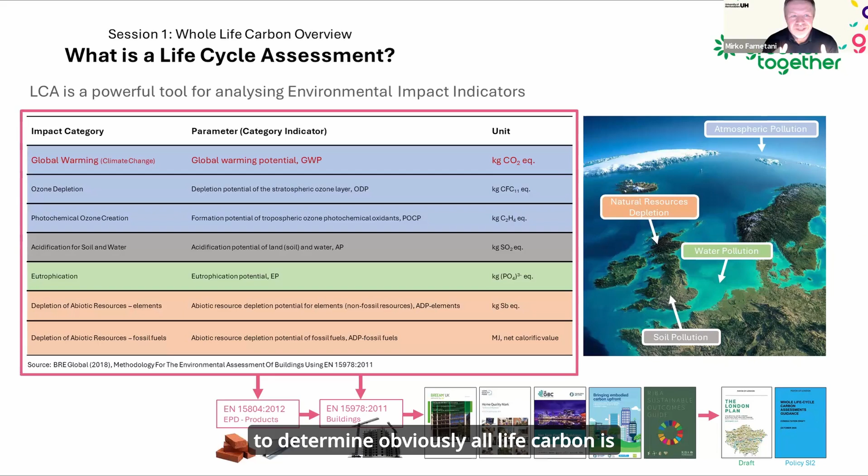So let's start from the whole life carbon overview. What is important to determine whole life carbon is to use a tool with which it is possible to prepare results for this particular sustainability aspect. And the tool we normally use is a life cycle assessment. Now, a life cycle assessment is a powerful tool for analyzing environmental impact indicators.

I would like to stress environmental impact indicators because what we normally assess in terms of whole life carbon is normally one indicator that is possible to assess in life cycle assessment. And the indicator is the global warming potential. The global warming potential is normally called embodied carbon as well. So in other words, if you hear about global warming potential or embodied carbon, consider the fact that they are the same thing.

I think what's important in whole life carbon, in life cycle assessment and all the indicators, is that by performing a life cycle assessment it is possible to define a lot of impact indicators that show not only the impact on the atmosphere, meaning global warming potential, but also water pollution, soil pollution, and natural resource depletion as well.

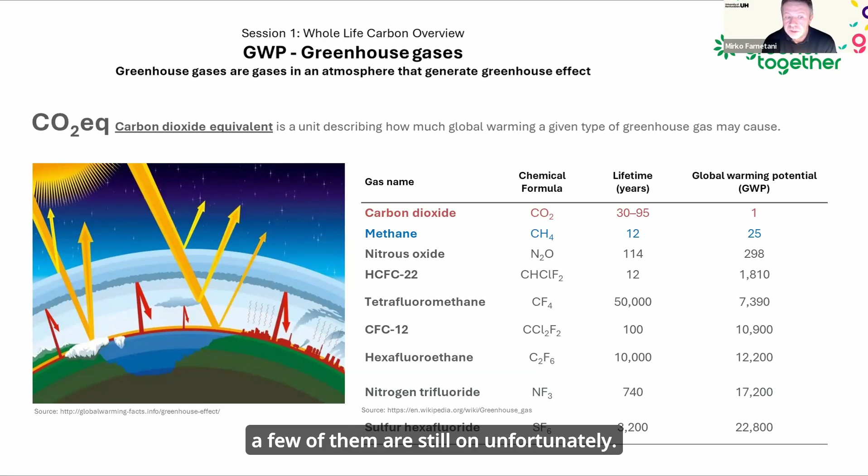Okay, so next slide. So in order to define the whole-life carbon, it is important to understand that whole-life carbon is the sum of embodied carbon and operational carbon, okay? And particularly the embodied and operational emissions are to be considered from the extraction of raw material till the end of life of a building. So this basically defines the whole-life carbon.

It is important for you to understand all of these definitions, because if you have to deal with projects, particularly for clients' requests, it is important to address the meaning of all the expressions, because in this case you have to deliver what the client brief demands.

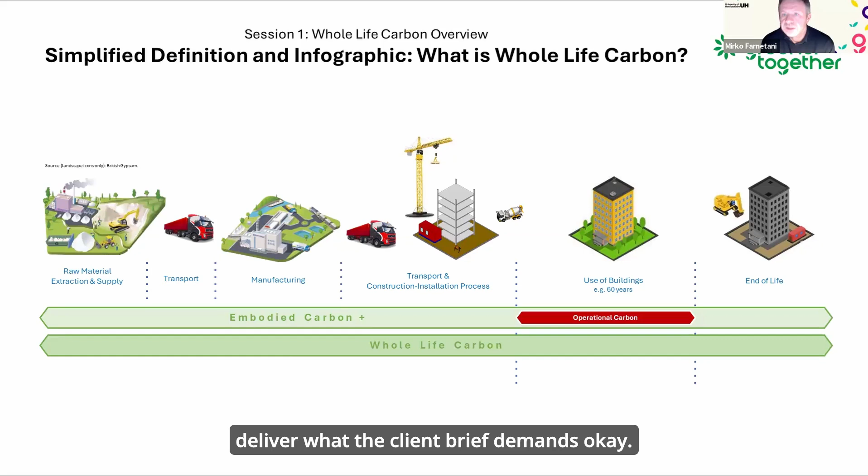Now, I mentioned before that in order to assess buildings, we normally use in the industry the EN 15978. The EN 15978 is a European standard, but it is used globally. It is actually used in the US as well. However, there is another international standard, the ISO, I think it's 22,000 and something, or 27,000 and something, that is very similar to the EN 15978, but of course there is something different. However, they are considered as equivalent.

Now, the reason why I'm saying so is because, again, it would be very useful for your personal knowledge to know all of these data, if you will need to deal with all of these requests. So this graphic comes from the LETI embodied carbon primer. If you haven't downloaded it, you can download it, because it is free, available from the LETI website.

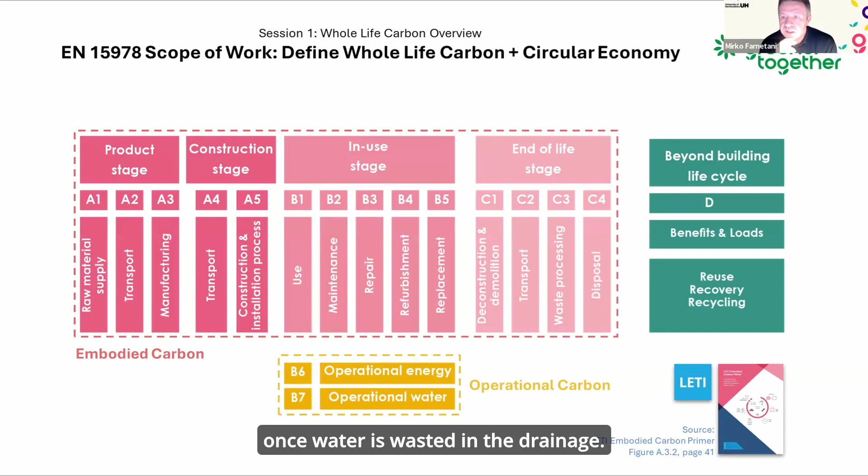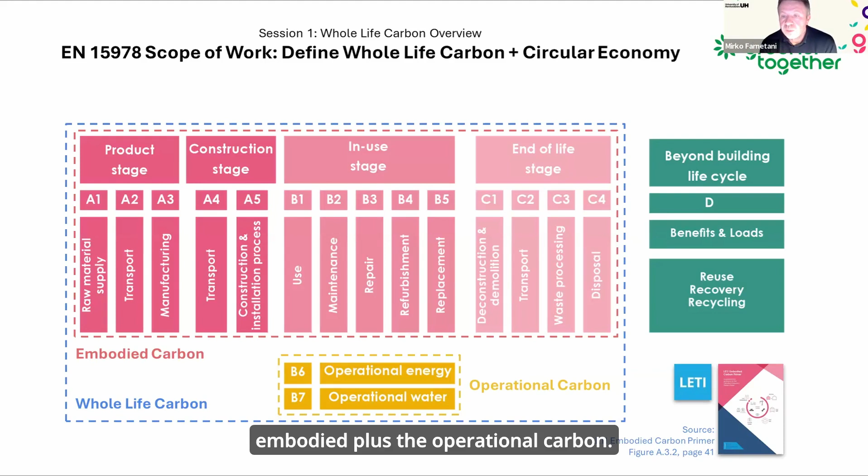The whole-life carbon, as defined before, is obviously the embodied plus the operational carbon. I think the concept is straightforward, I suppose. So the standard defines another module, which is called module D. And module D defines circular economy benefits and loads. This is defined by the standard, particularly for the reuse, the recovery, and the recycling of building materials after the end of life of a building.

Okay. Now, if you consider, for example, modules B4 and B5, refurbishment and replacement, of course these are emissions that happen during the life of a building. For example, if you take into consideration replacement in a commercial building, a typical replacement could be the replacement of carpets, floor finish carpets. In this case, the emissions should be reported under these modules. And if any piece of carpet is going to be recycled, reused, or recovered, it will be reported under module D as well, because it is considered end of life of a building product.

Okay, so we can move to the next slide. Are there any questions here at all? No? Okay. Oh, we don't have any questions. If there are any, I will tell you. Yeah, okay. Thanks.

Okay, so I think this is a particularly important subject, meaning the scope for carbon reduction, because normally in embodied carbon analysis, what is important is not only to analyze, but to reduce the impact as well. So normally in a typical building, a reduction between 15 to 25% against a baseline is possible to be achieved without any cost increase. If the building targets a reduction above 25%, there could be some cost implications. Now, this is a kind of rule of thumb. Every building is different, and therefore this percentage could vary. But you can use it as a kind of rule of thumb.

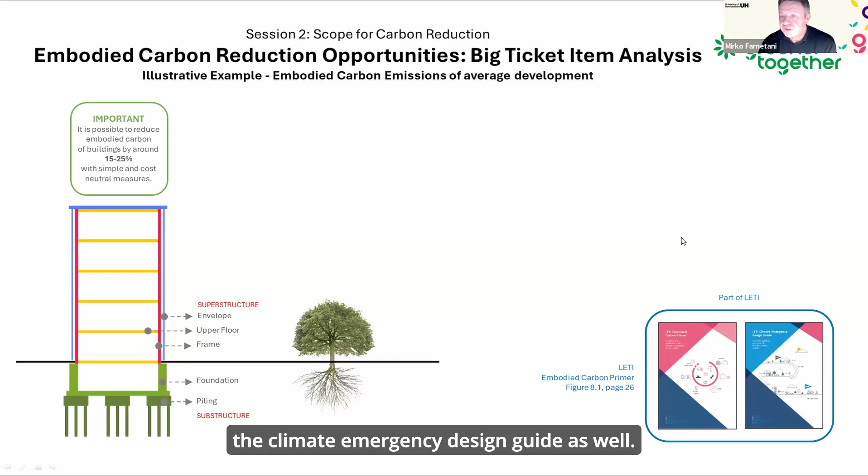So I'm going to talk in this session about the big ticket item analysis. This is normally the kind of analysis for preparing an embodied carbon reduction strategy. It is defined in the LETI embodied carbon primer and the climate emergency design guide as well, so you can download them and find out more. Right, so the first step to be carried out is to analyze the full building. This could be a typical analysis of a full building, and a few building elements are more carbon intensive than others. So this is a kind of typical distribution. Of course, it could be completely different. It depends on building types and building element types as well.

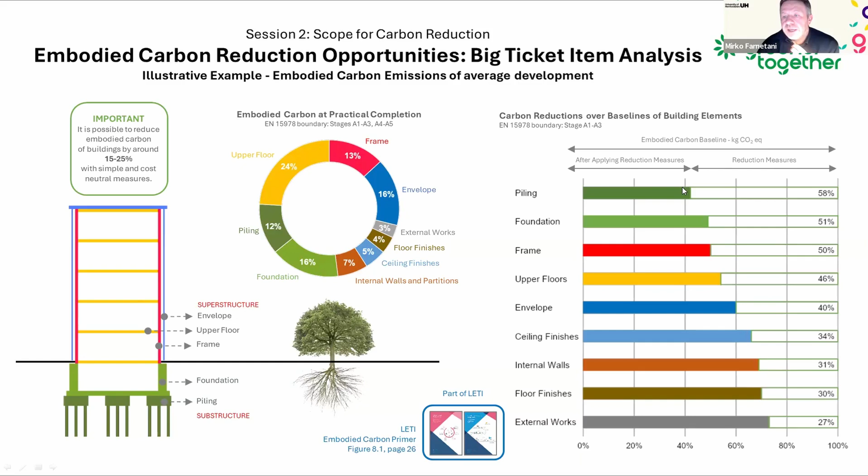Now, if we carry out a further analysis, and particularly if we try to understand what kind of building element is more carbon intensive, and where the low carbon measures are possible to be achieved, this could be a typical graph you can prepare. I'm talking about the bar chart here on the right-hand side. So in other words, for example, for the piling it is possible to reduce the embodied carbon emission by 58%. The upper floor, in this case, can be reduced by 46%. The external works by 27%.

Now, of course, it is understood that the top 5 building elements are the most important building elements to be addressed. This is because, first of all, you can achieve the highest reduction measures, and also because you have to consider the carbon distribution of the full building. In fact, you can see that envelope, frame, upper floor, piling, and foundations are the highest emitters in terms of building elements. Now, if you consider those 5 building elements and their potential for reduction in carbon emissions, you will achieve the highest embodied carbon reduction. Of course, it is a rule of thumb that if you address the biggest contributors, you will achieve the highest reduction with the minimum effort.

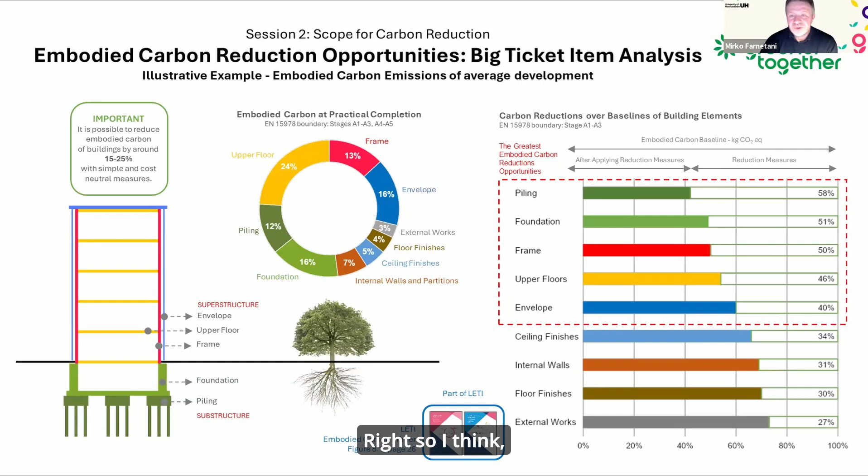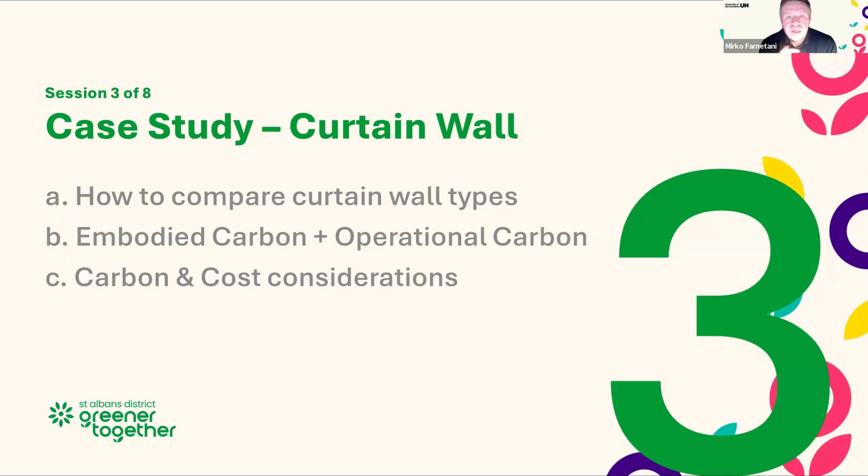Right, so if you have any questions, feel free to ask, because now we are moving to the second part of the presentation, which is the case studies. So the first case study is the curtain wall. This is a case study you can download from the website, and there will be this picture here and other details. However, this case study was used for preparing chapter 2 of the Targeting Zero book. I am the co-author of this chapter. So if you want to know more, you can buy the book and read the full contents as well.

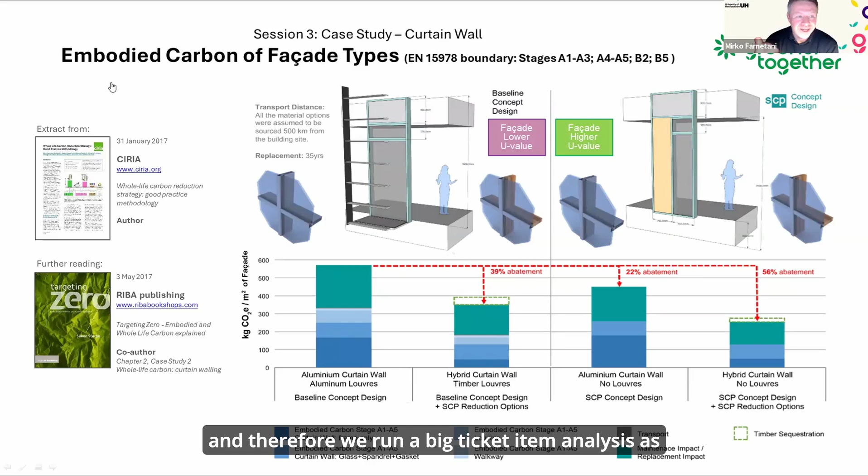So just to describe this case study, the facade case study is from a building in the King's Cross area. At the time when I was involved in the project as a carbon lead, our scope of work was to reduce as much as possible the carbon footprint of the building, and therefore we ran a big ticket item analysis, as I showed before. What came out was that the facade had a pretty considerable impact within the full building carbon assessment. So we tried to understand what was possible to be done in order to decarbonize the facade.

What we did was analyze the first option facade, which was a kind of fully glazed building plus a facade louver, to prevent direct sunlight penetration and to reduce discomfort in terms of glare. So the first idea we came up with was to change the facade layout. Instead of having a nearly 100% glazing ratio for the facade, the proposal was to go for more or less a 50% glazing ratio. Actually, if you consider the spandrel, it is higher.

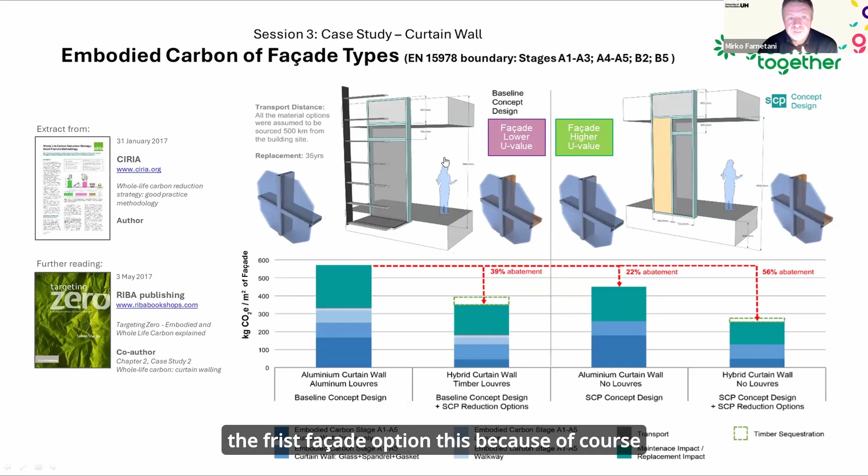Just by doing this, it was possible to achieve 22% abatement compared to the first facade option. This is because it was possible to not consider the facade louver, and so it is possible to achieve this kind of 22% abatement.

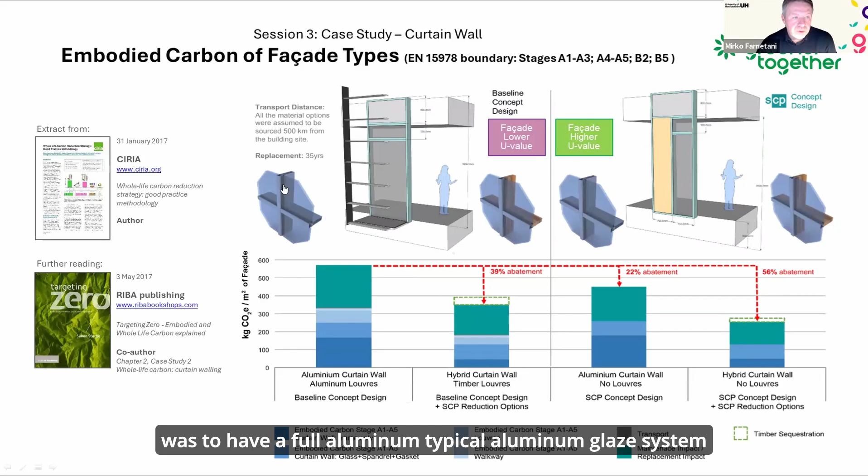Now, because we were not happy with the result, we decided to apply an additional low carbon measure. The initial idea was to have a typical aluminium glazed system. What we introduced, instead of a full aluminium frame curtain wall system, was a composite curtain wall, meaning timber frame internally and aluminium frame externally. This generated a lot of carbon reduction. By going from a full aluminium curtain wall to a composite aluminium curtain wall, it was possible to achieve 39% abatement.

And then, if the carbon reduction is linked to both the new facade layout and the new curtain wall frame, meaning composite instead of full aluminium, a further reduction was possible to be achieved, meaning 56% abatement compared to the baseline. I have to say that 56% abatement is an amazing result.

But obviously, this was a suggestion to be taken into consideration by the design team. And actually, I was very happy that the design team, particularly the architects and the facade engineer at the time, were very happy to take on board our advice from our consultancy, and they decided to go for this kind of layout.

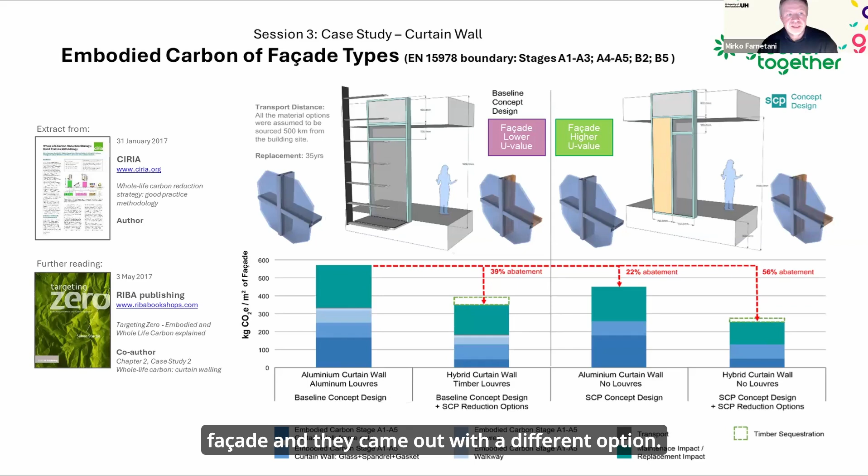So in this case, the architects and the facade engineer redesigned the full facade, and they came out with a different option. Now, because the client was very keen on reducing the carbon, the client was keen on exploring the composite curtain wall as well.

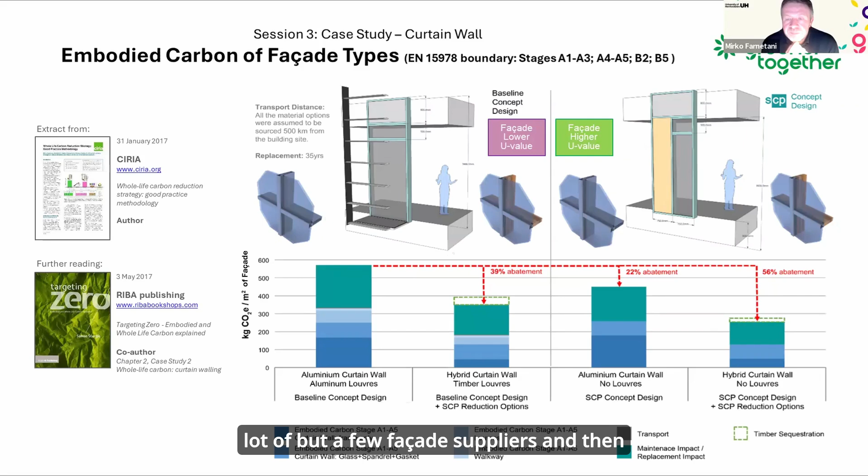So in this case, a market investigation was carried out, and the market investigation was to contact, let's say, a few facade suppliers. And then we requested the cost of delivering both the aluminium curtain wall and the composite curtain wall. The exercise was carried out with a cost consultant as well.

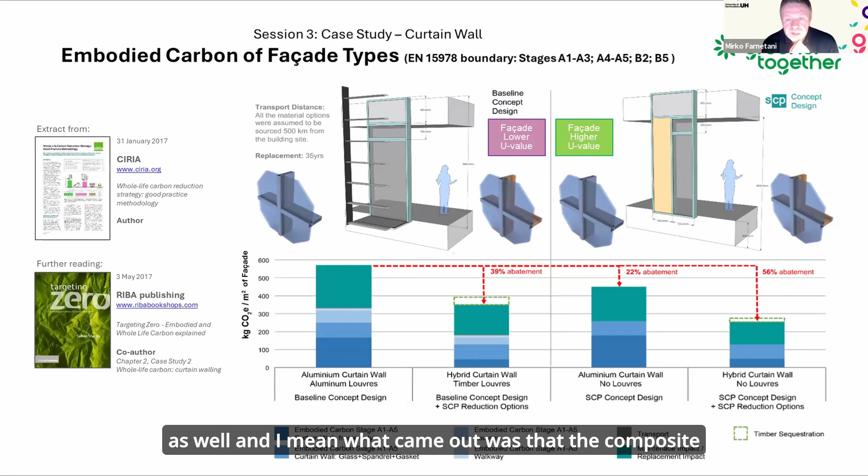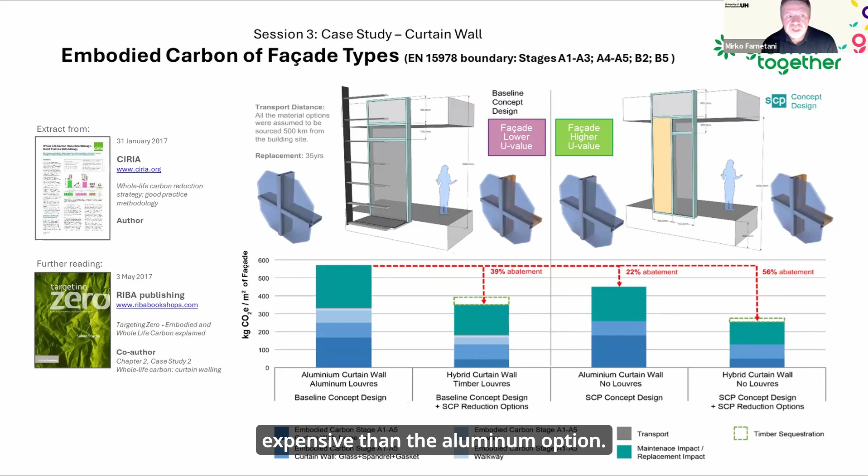And what came out was that the composite curtain wall, unfortunately, was more expensive than the aluminium option. So in this case, the client came out with their conclusion, and they decided to not proceed with the composite curtain wall, because the price of the facade was out of their budget.

Okay. However, from my point of view, what was very interesting in the exercise we carried out was that we basically established a new way to approach how to procure facades in the construction industry. And of course, it was an amazing lesson learned for everybody.

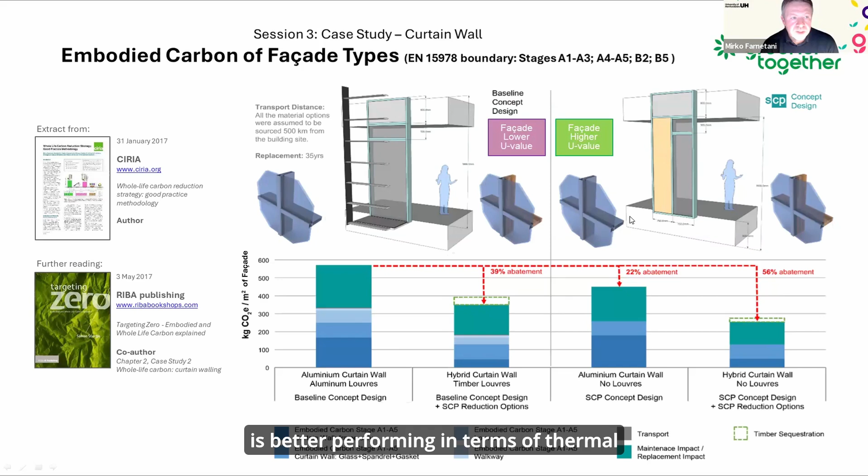So something to add to this case study is that the reason why the alternative facade layout was successful was that the alternative facade is better performing in terms of thermal performance as well. Meaning, this facade U value was higher than the previous facade layout. And therefore, it was able to achieve a lower energy consumption with the alternative facade. Perhaps it was successful for that reason as well.

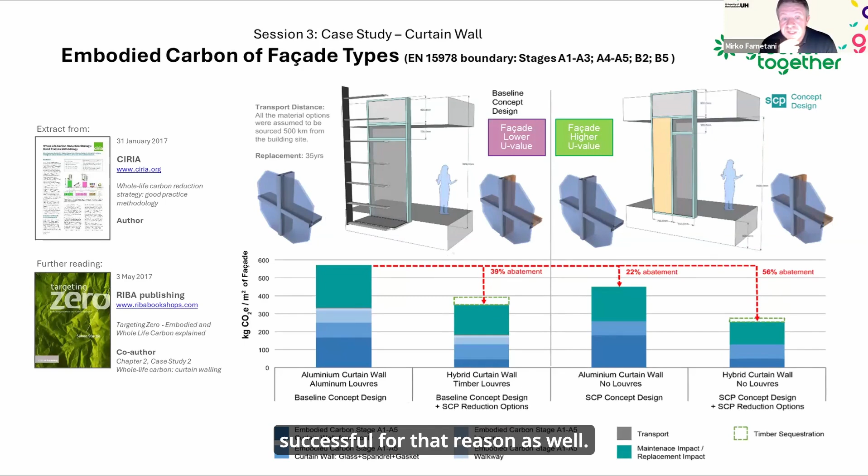Okay, so I think we can go to the next case study, which is about paint and paint types. So this is a typical comparative of paint types that could happen in any kind of project. I think what is important here is to understand how a comparative analysis of a particular product could be done. And so in this case, the brand is Dulux, and all the options are about

one brand. However, it is good practice to carry out a multi-product comparison as well, meaning in terms of supplier, okay? Because in this case, you can explore other suppliers. It could be that other suppliers come with better carbon figures, and it could be that another supplier could be cheaper and lower carbon as well. So it is good practice to investigate multiple suppliers, but for the purpose of this session, this can give the message I would like to convey.

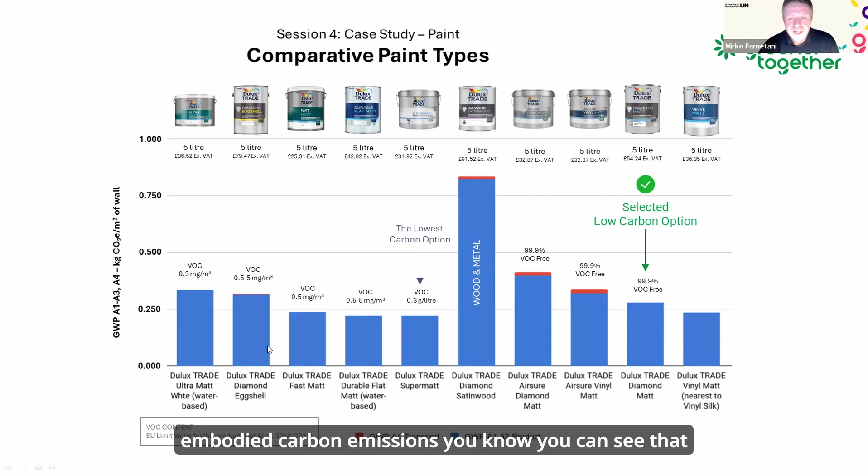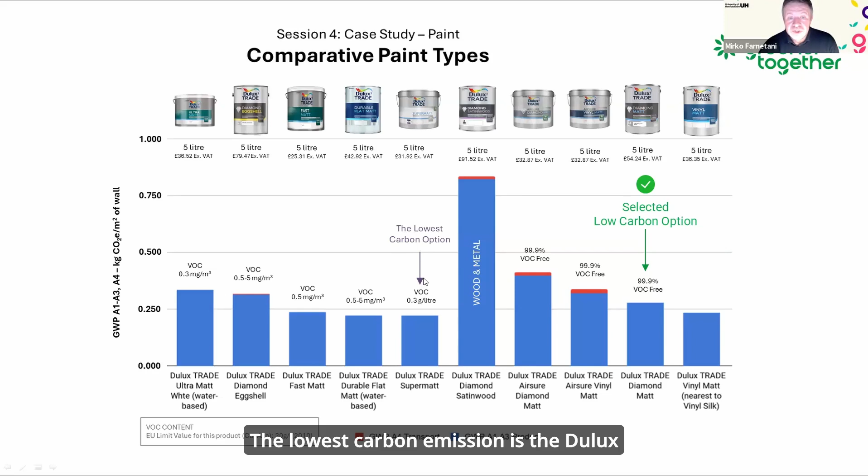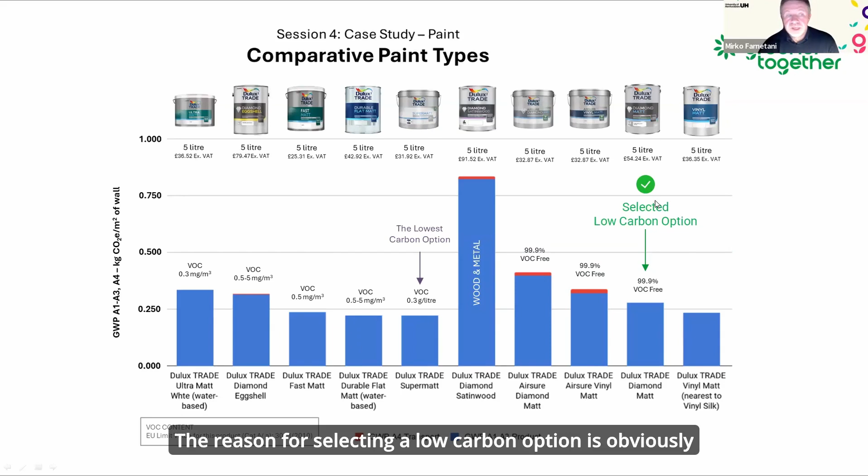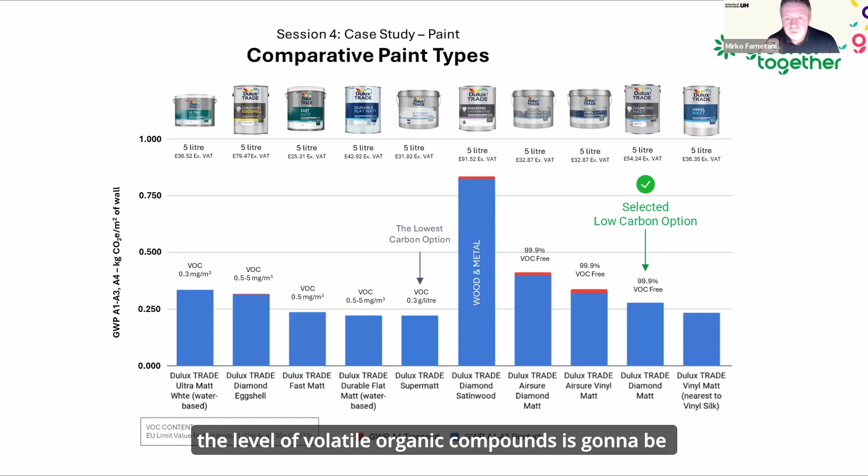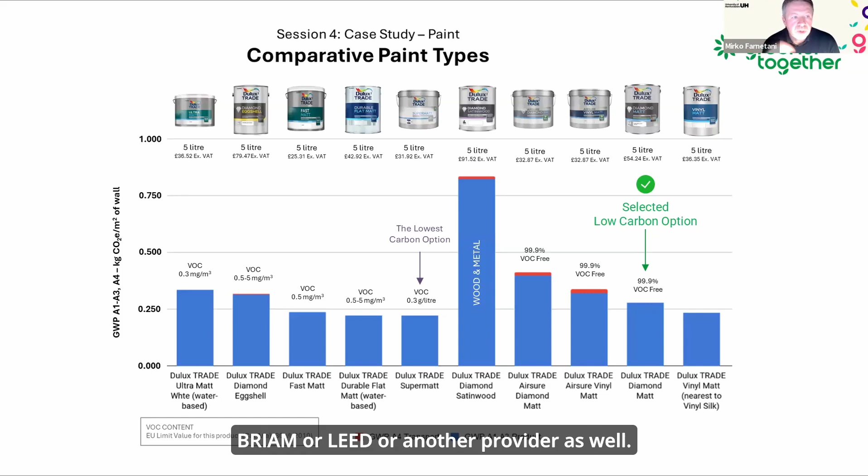Okay. The reason for selecting a low carbon option is obviously not only carbon, but there are other indicators as well, and they are very important, particularly for interior design. So one of the important indicators to be considered is the volatile organic compound index. This is because these are paints which are going to be used for interior design, and therefore the level of volatile organic compounds is going to be important, particularly if you are reporting towards a green rating system, for example, BREEAM or LEED or another provider.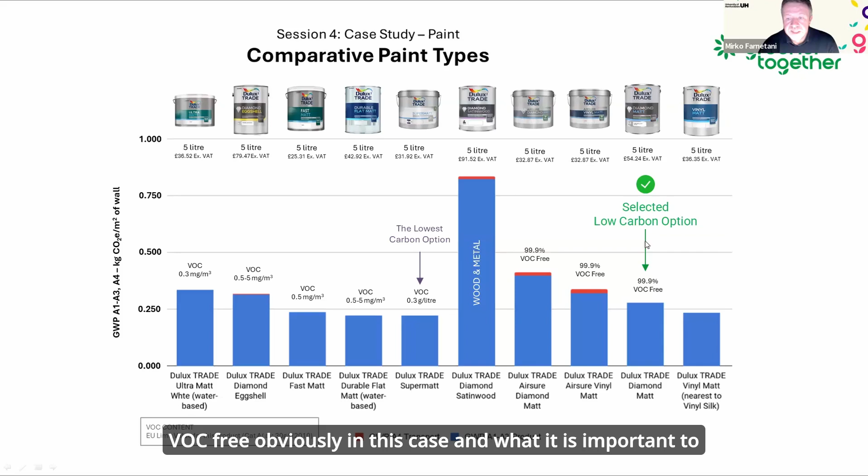What you can see here from the difference between the lowest carbon option and the selected option is that the selected option comes with a better VOC level. It is nearly 100% VOC free in this case. And what is important to understand as well is the EU limit value for volatile compounds. So this could be another important indicator to be considered for your designs too.

However, what is important as well to be considered in paints is the quality of paints. So in this case, the Diamond Matt was decided to be adopted because of the quality of the product as well.

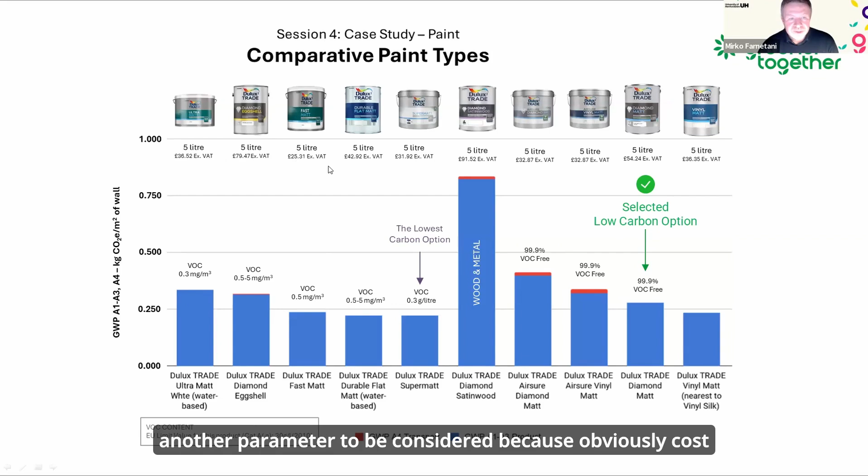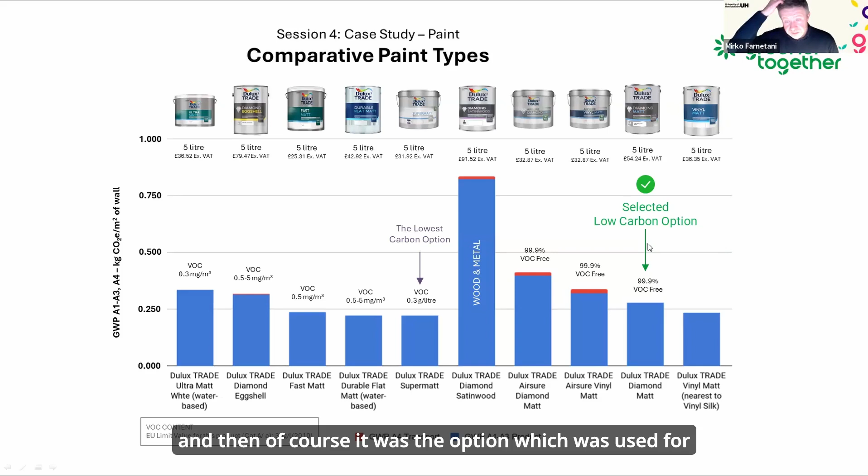So talking about costs, this is another parameter to be considered, because cost is always good to be considered. In this case, it is clear that the selected option was not the cheapest. And so in this case, what was very important was to go for a high quality product and for low carbon, and for low VOC as well. It was a good compromise, let's say, between environment and cost, and it was the option which was used for the interior design.

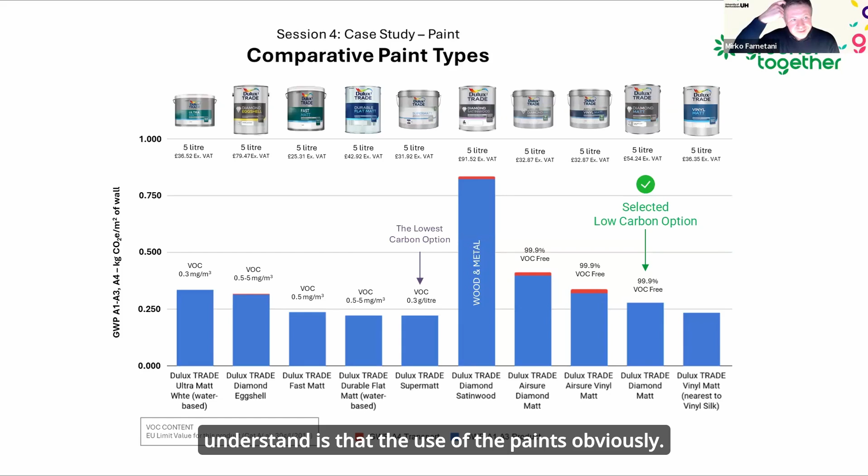This one. What I want to mention in this case is that when you compare this kind of products, what is important to understand is the use of the paints, obviously. For example, if you assess paints with closed eyes, it could be that you consider this kind of

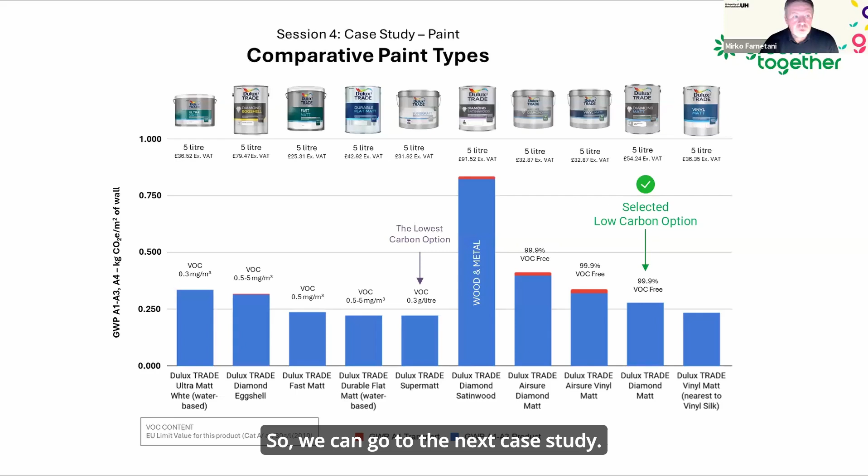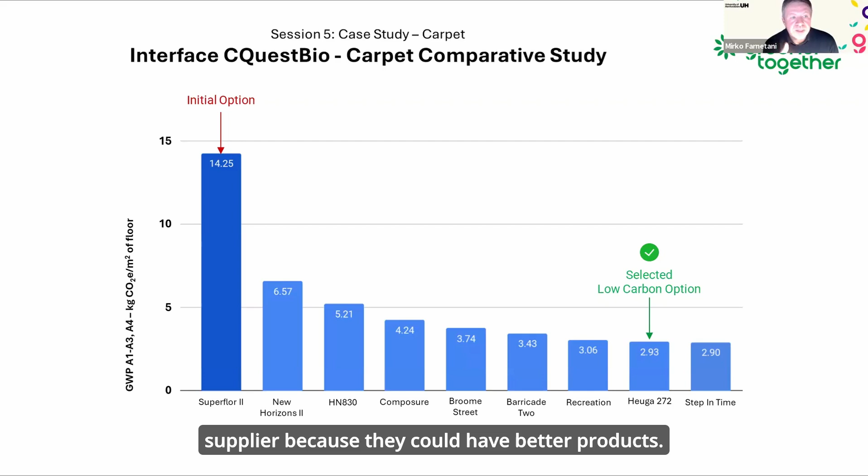case study. So the next case study is carpet. Again, it is very important to carry out a comparative analysis of products. In this case, again, it is one brand, which is Interface. And as I mentioned before, it is always good to compare other companies, other suppliers, because they could have better products. However, when dealing with this kind of items, it could be that the architects are more keen on a specific brand, and therefore perhaps the architect would like to consider only one brand. Okay, so this is another potential element to be considered in your assessment.

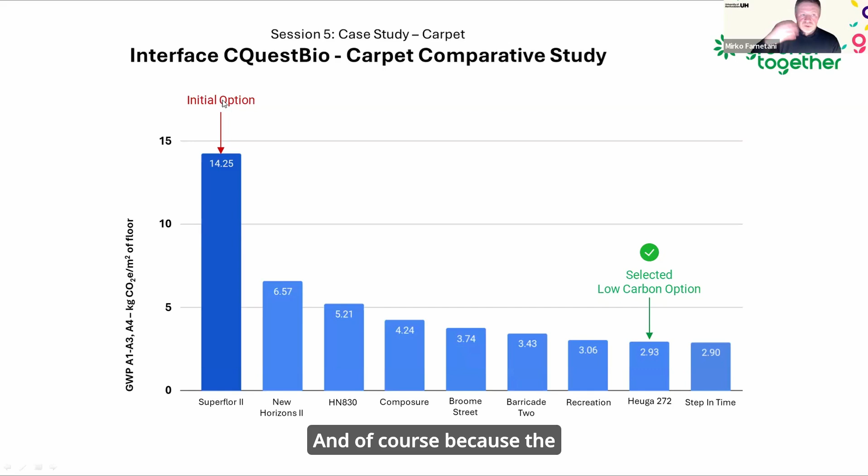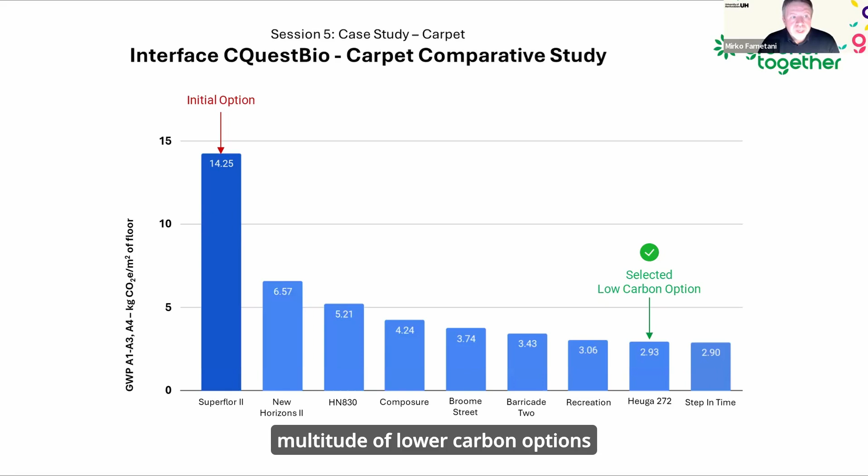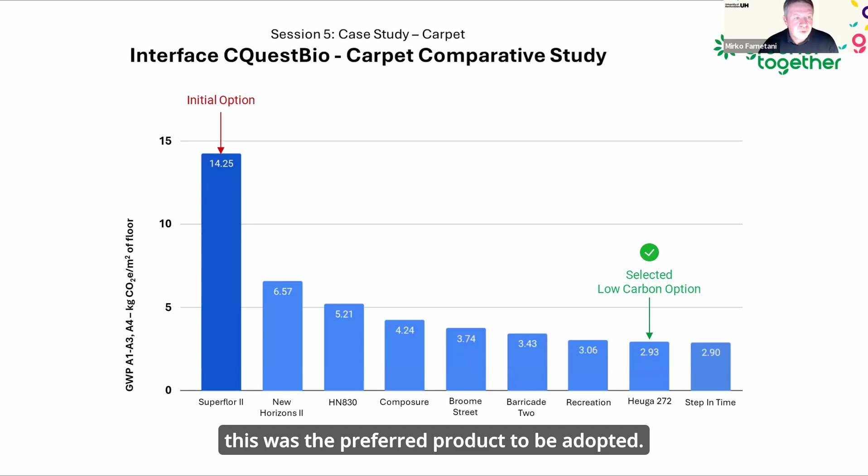Just to talk about this case study in particular, the initial idea was to use this particular item, and of course, because the project was to decarbonize the interior design scheme, any potential alternative to the initial idea for the carpet was analyzed. And what was found out was that there were a multitude of lower carbon options. And after talking to the architects, it came out that this was the preferred product to be adopted.

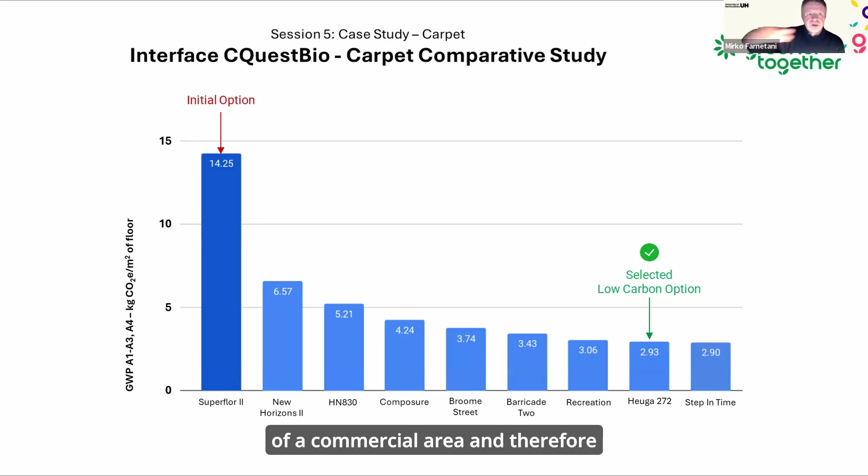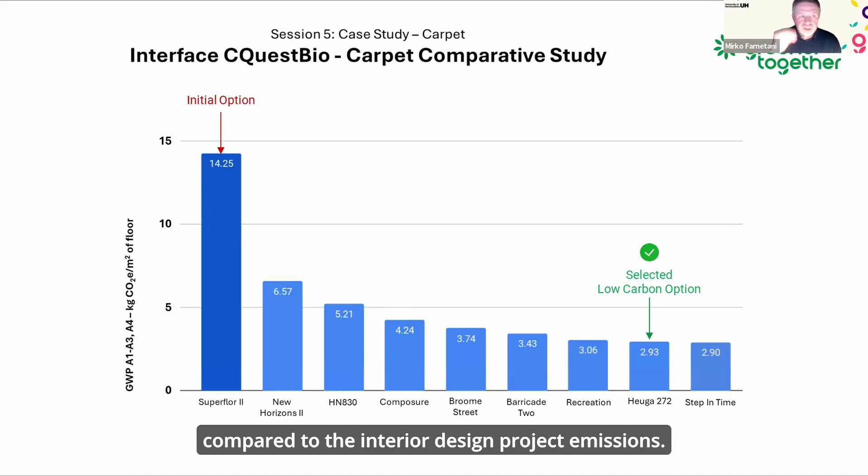And actually, if you compare the two inputs, it is clear that the reduction was definitely bigger, particularly because carpet normally covers more or less the full NIA of a commercial area. And therefore the reduction could be pretty considerable compared to the interior design project emissions. I have to say that in this case the adopted option was cheaper as well compared to the initial option, and therefore this was a win-win situation.

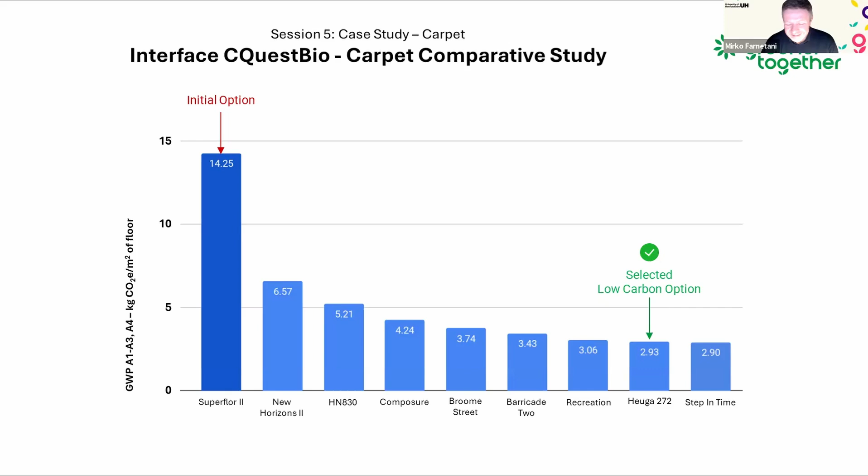Okay, so the next slide is still about carpet, and the reason why I like to compare those two products is because often a project could take into consideration only one brand and not consider other brands, which could be less carbon intensive. So in this particular case, it is clear that the left-hand side is more carbon intensive than the right-hand side. And often this kind of approach could be a bit misleading as well, because

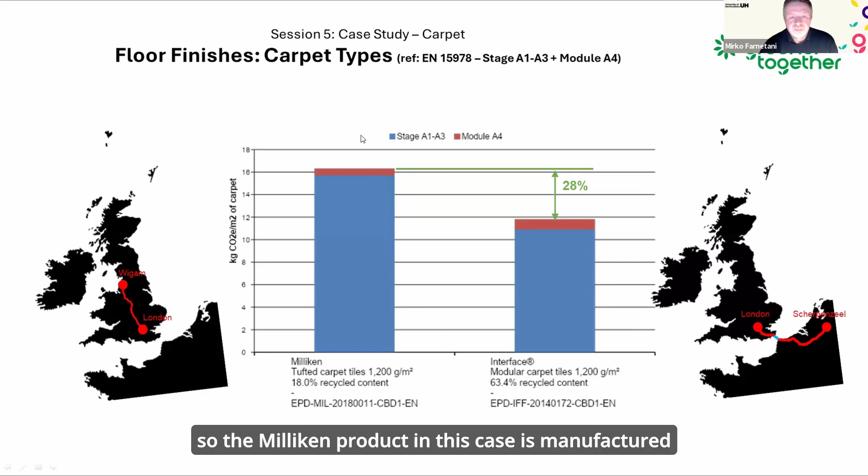the Milliken product in this case is manufactured in the UK, whereas the Interface option here is manufactured in the Netherlands. So it could be understood that a product which comes from a closer location could be less carbon intensive. This is not always the case. In this particular example, I just wanted to demonstrate that although a product could come from a closer location, the product itself could be more carbon intensive than something which is produced further away.

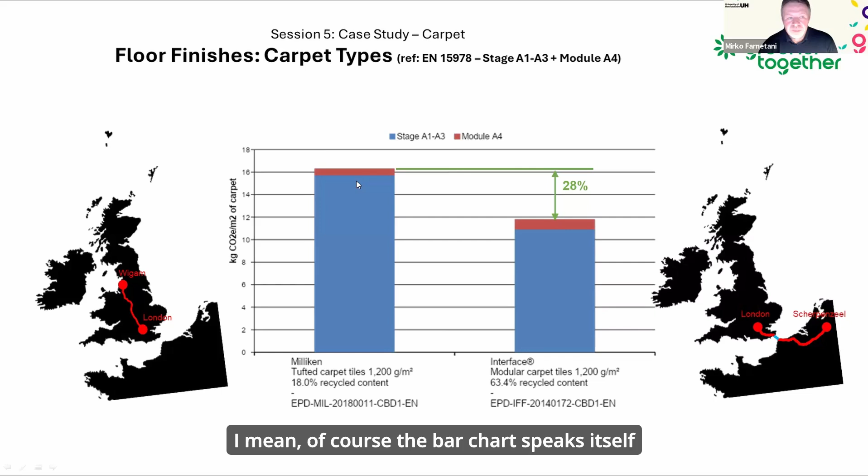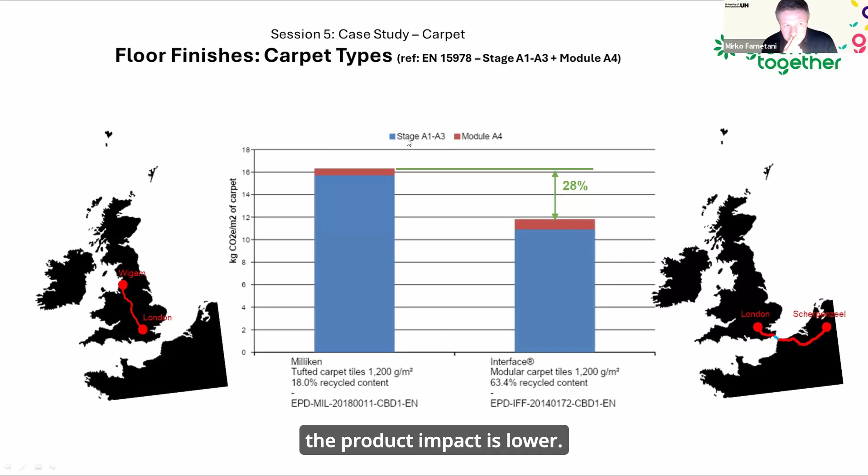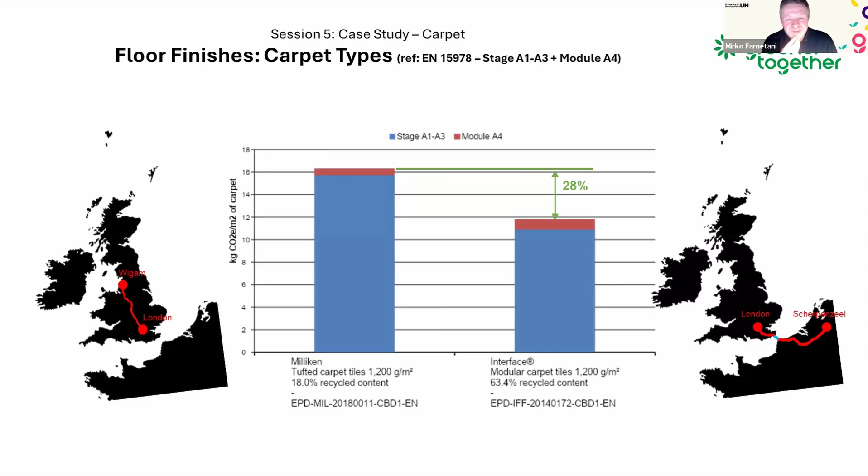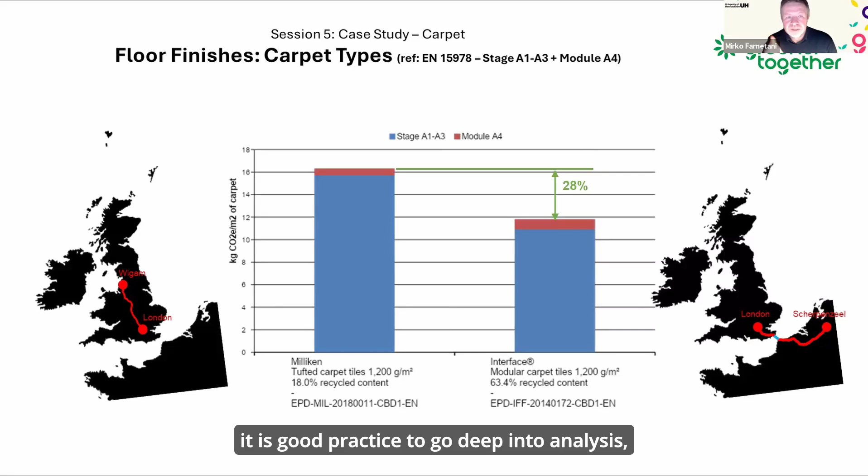Of course, the bar chart speaks for itself, and it is clear that the blue bar, which expresses the product impact, is lower. However, the transportation impact, the red part of the bars, for the Interface transport is higher. However, if you look at both, the Interface is still the lowest carbon option. I like to introduce this kind of slide because it makes you think about all of this kind of analysis, and sometimes it is good practice to go deep into analysis in order to find the best carbon option.

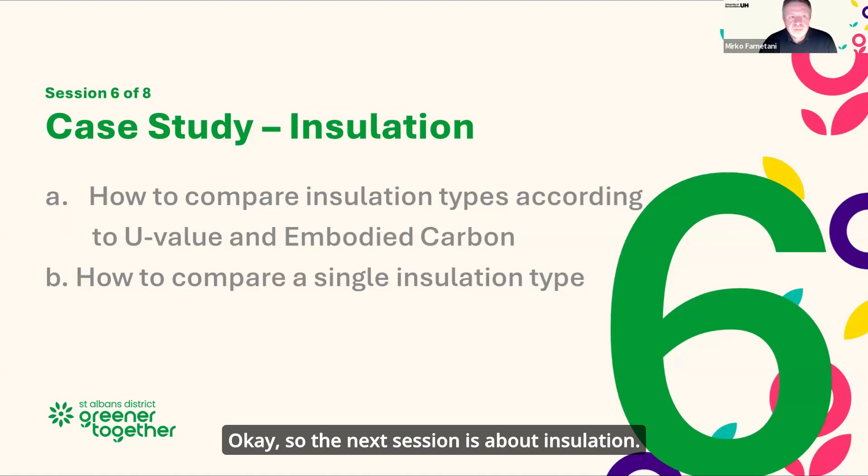Okay, so the next session is about insulation, the case study for insulation. This is another case study. This was actually a retrofit building where the insulation was considered to be used in facade replacement or facade enhancement. This was part of the study I led for this particular project, because the client was wondering if it was better to enhance the facade or to replace the facade.

So in this case, an analysis of the insulation types was carried out, and here are the results. You can see that it is not only one brand, but a multi-brand study. However, because the facade was under fire regulation, the facade insulation had to be Class A, so it should be fully non-combustible. Therefore, the two options here on the right-hand side were disqualified after understanding that the insulation had to be non-combustible.

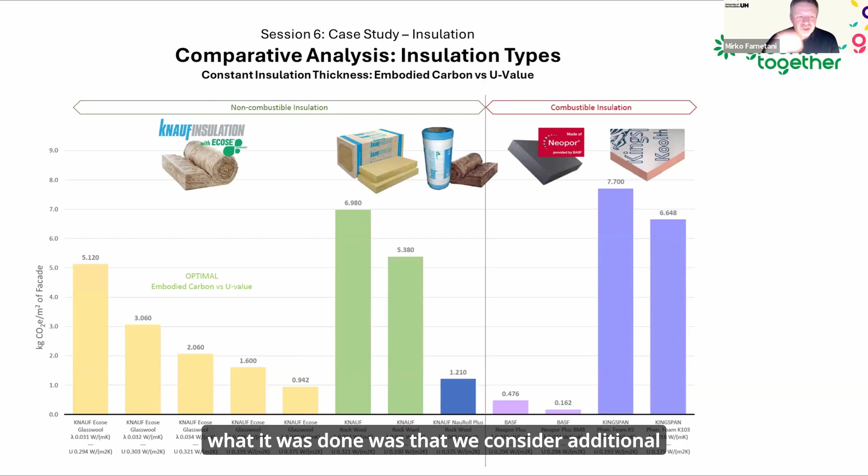Throughout the discussion and the analysis, we considered additional insulation types as well. We added to the equation, meaning to this graph, an additional insulation type, which is the aerogel. Now, the client was very fascinated by the aerogel because it was possible to deal with a reduced thickness of the facade.

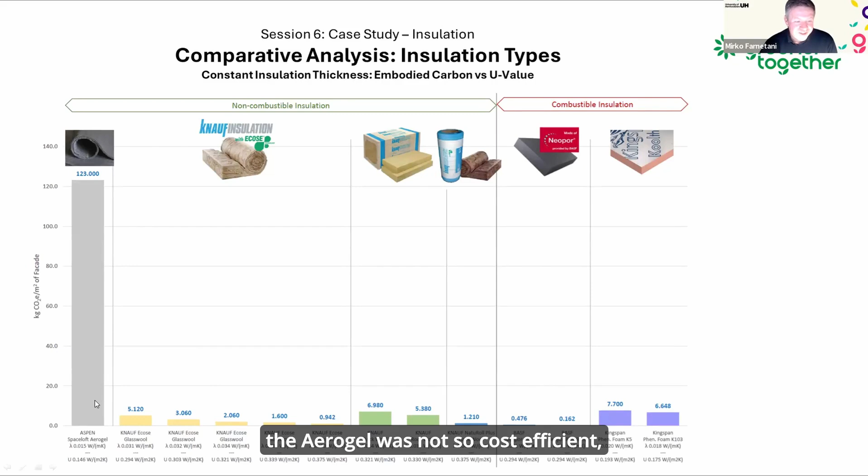Okay, so in this case, what the client was interested in was that the NIA of the project could increase because of the reduced amount of facade insulation. However, because, as I mentioned, a cost analysis was carried out, it was found that the aerogel was not so cost efficient. Actually, it was much more expensive than mineral wool.

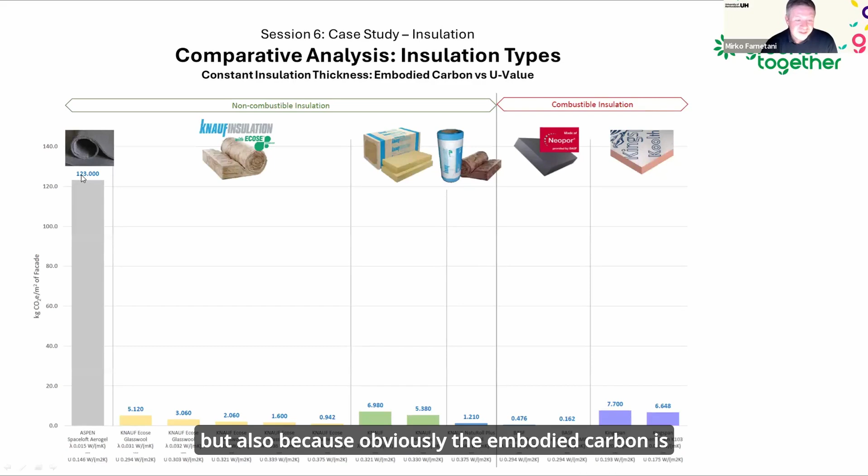And despite the fact that perhaps it could be beneficial for NIA, it was decided to drop it as an option, but also because the embodied carbon is definitely higher than all the other solutions. So perhaps it was a wise decision.

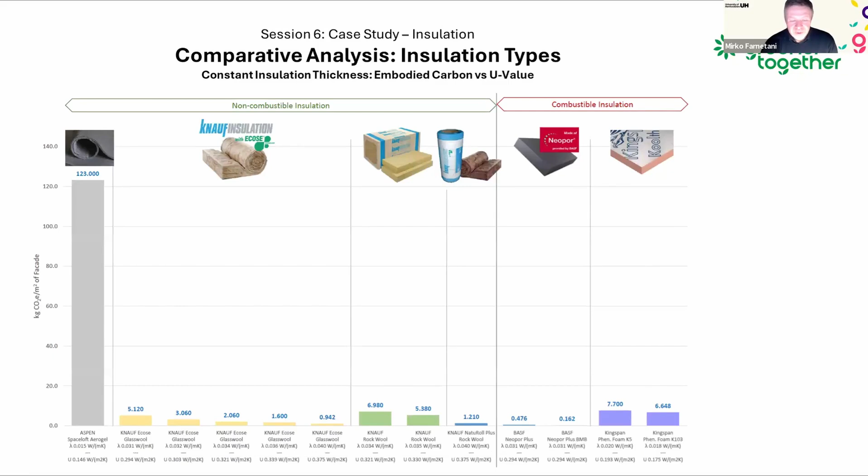Okay, so we can move to the next slide, and this slide links the importance of facade U value and embodied carbon, meaning it is an excellent example to link operational and embodied together. Particularly here, the case study is about the insulation layer of the wall buildup. Of course, the insulation layer is the element that provides the thermal characteristics, and therefore it contributes to the embodied carbon and to the wall U value as well.

So in this case, five different kinds of insulation were considered, and the analysis was carried out by considering a fixed U value of the wall. Because all the insulation types come with different thermal performance, the insulation thickness within the wall buildup was different. As you can see here, the phenolic foam thickness was to be 95 millimeters, whereas for the rock wool option, the thickness of the insulation was 160 millimeters.

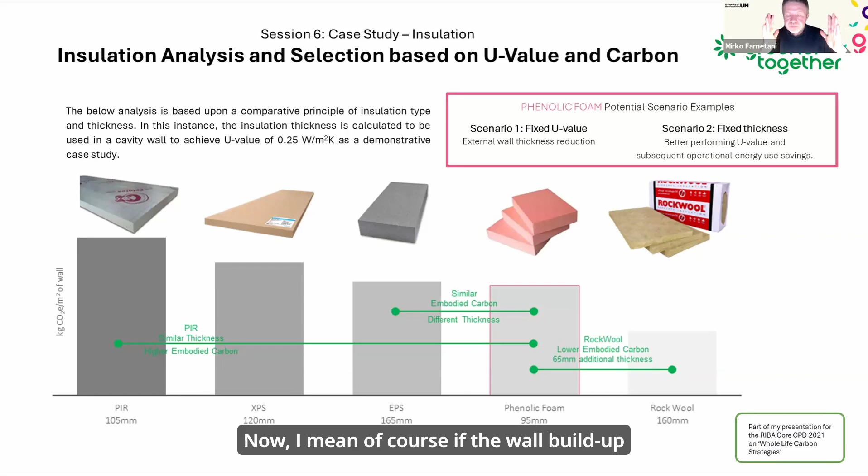Okay. Now, this is another parameter to be considered in your design, because if the target was to adopt, for example, the lowest embodied carbon option, the wall buildup would have had to be wider. And if the wall buildup is wider, in order to install the rock wool, there could be more subframe needed to support the facade cladding as well.

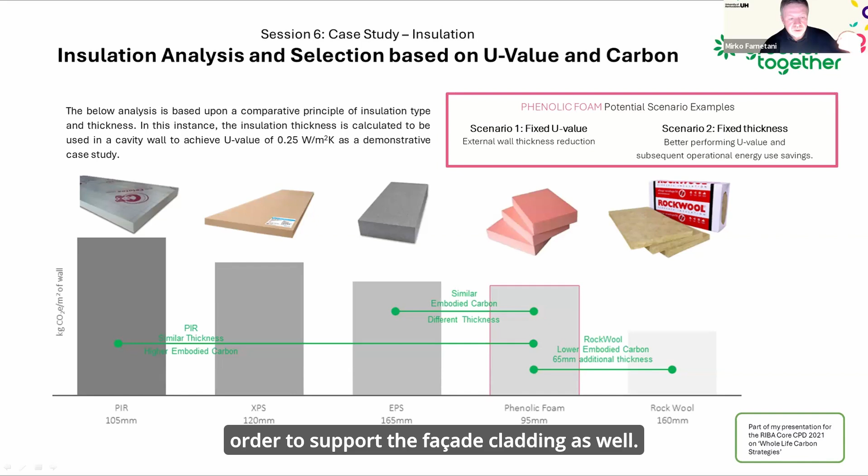And of course, in this case, perhaps although the rock wool insulation comes with a lower embodied carbon, it could be that the metal subframe could be more carbon intensive than the phenolic foam, because of course the gap would be bigger. Okay, so I just add all of this information to the presentation, because these are the typical questions that you should ask the design team, and particularly these are all the considerations that you should come out with in all of your analysis as well.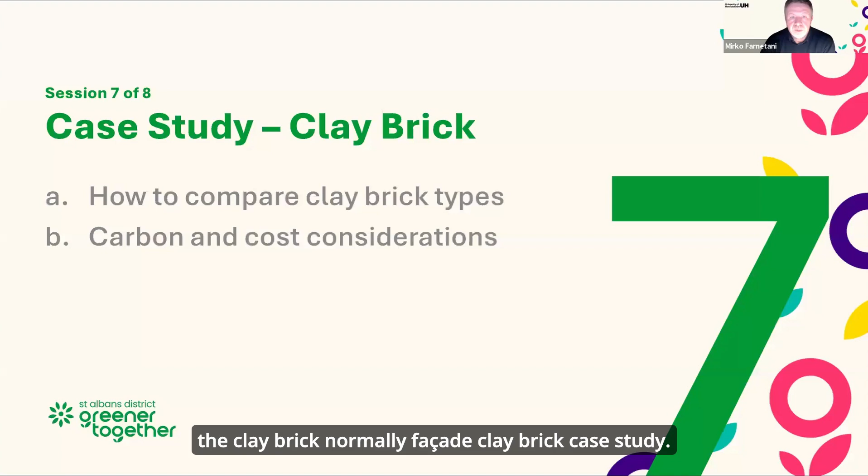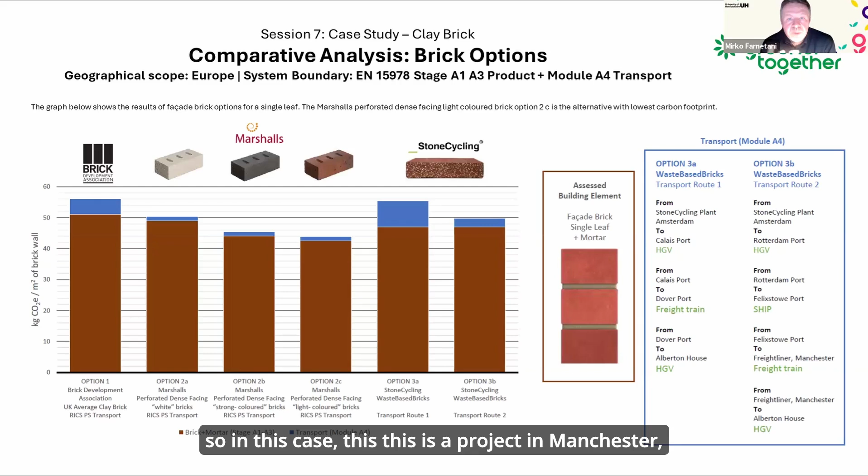Okay, so we can move to the next. So this is the facade clay brick case study. So in this case, this is a project in Manchester, if I remember well, yes, and the idea here was to have a clay brick facade cladding, and therefore what was explored was different types of bricks. So in this case we used this as a baseline, and then we assessed the Marshalls options plus the Stone Cycling options as well.

And these are the results from this analysis that consider products plus transportation. So as you can see here, the impact is different for all the brick types. And it is important as well to see the difference here in terms of transport emissions. This is because it depends on how the transport is carried out, so in this case, there are two options for transportation, and you can see that if the transport considers some vehicles rather than others, the impact could be completely different.

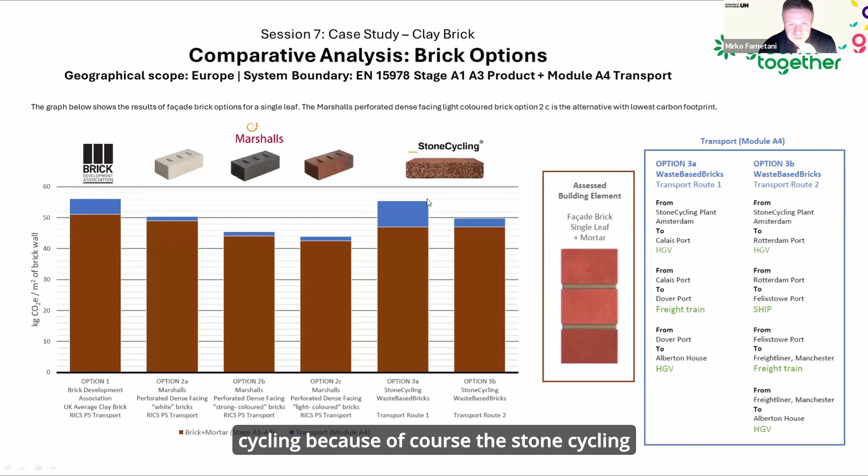Now, the client was fascinated by Stone Cycling because, of course, although it is a bit higher in carbon compared to this and this option, Stone Cycling comes with an amazing story in terms of circular economy. And therefore the client was very keen to explore the Stone Cycling options. However, the Stone Cycling option was more expensive than these other bricks as well, because it is a pretty particular manufacturing product. However, the credentials are very interesting in terms of sustainability and circular economy as well.

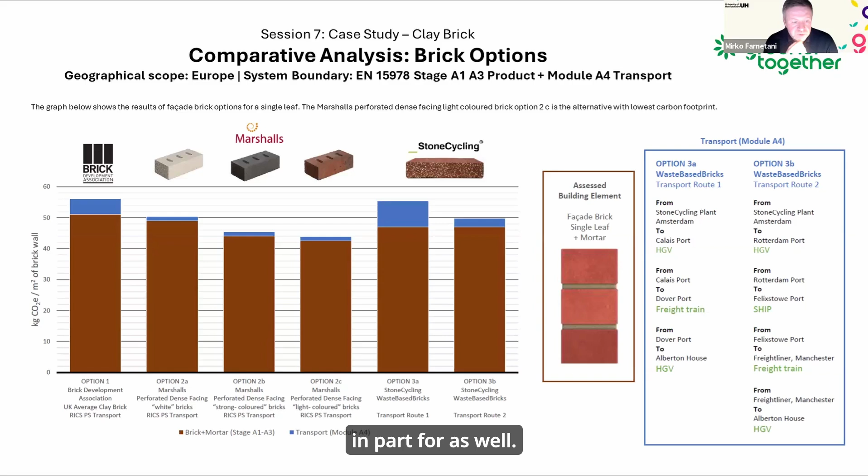I would suggest you consider this kind of brick because a few clients could be very interested in adopting this kind of product as well, even if it is more expensive and fairly more carbon impactful as well. Okay, so next slide, and this is the last one.

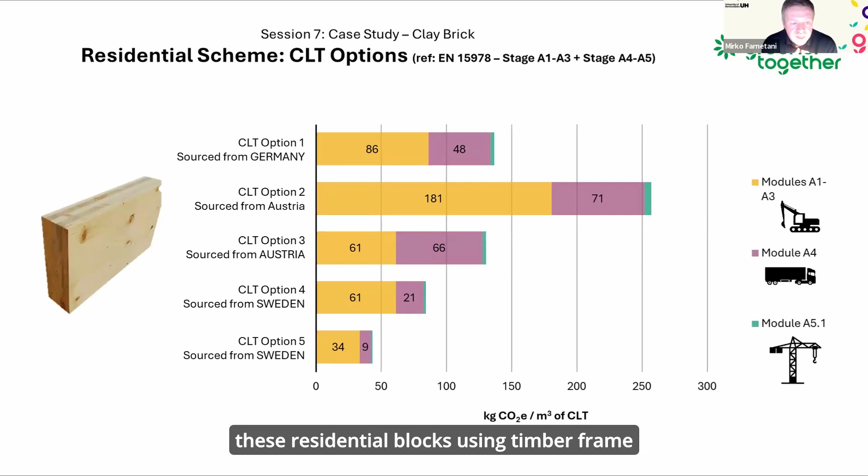Okay, so this is about structural timber, particularly CLT types. This is a project which was in Sweden, and what was studied in this particular project was the impact of adopting CLT. There were a few buildings, and the idea was to build these residential blocks using timber frame, and therefore CLT was part of the equation. So in this case, we went through a multi-supplier assessment, and we found out that not all the suppliers are low carbon.

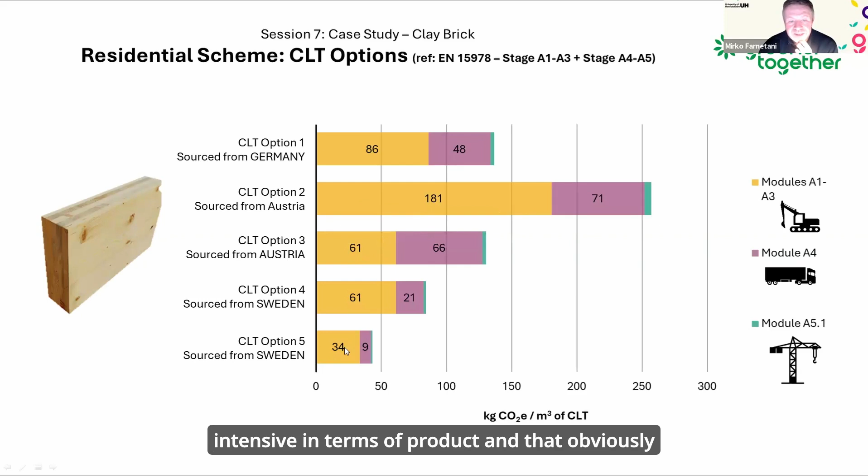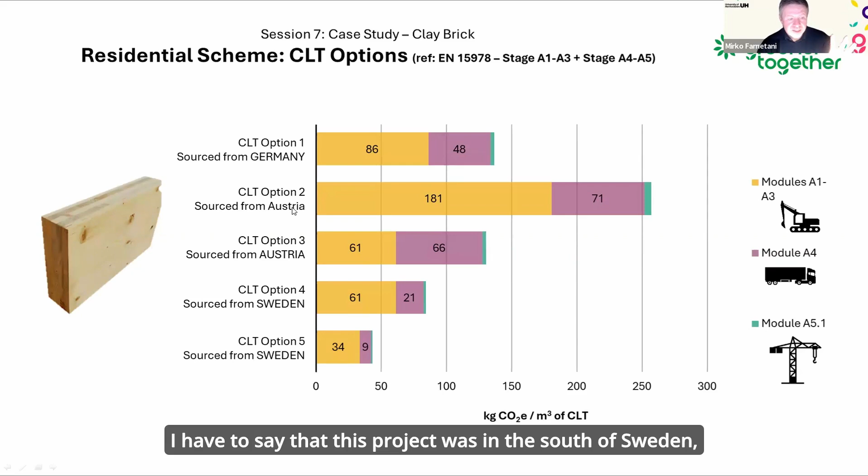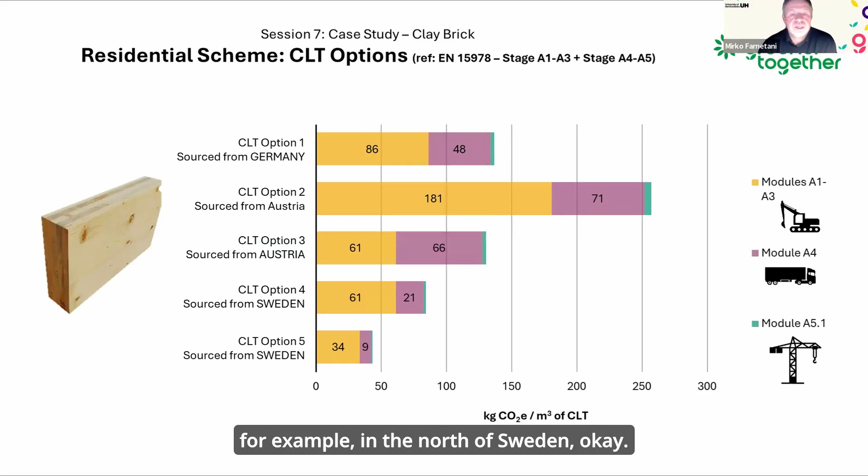And of course you can see that option 2 is definitely more carbon intensive in terms of product, and that this product from Sweden is definitely lower in carbon and lower in transportation as well, because it was definitely closer than a product coming from Austria. I have to say that this project was in the south of Sweden, okay? So the scenario could be totally different if it was, for example, in the north of Sweden, okay?

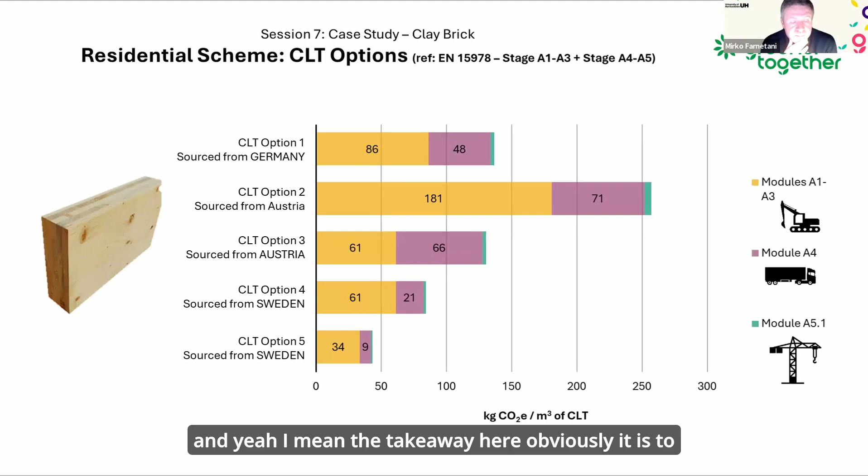And yeah, the takeaway here is to always consider a multi-supplier analysis, particularly because it is possible to see the carbon intensity difference, and also because you can tender through different suppliers, and therefore the price could be more competitive as well.

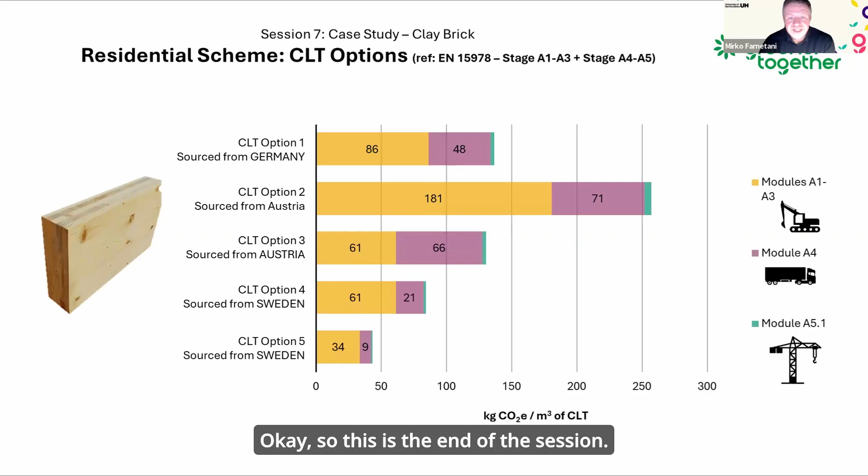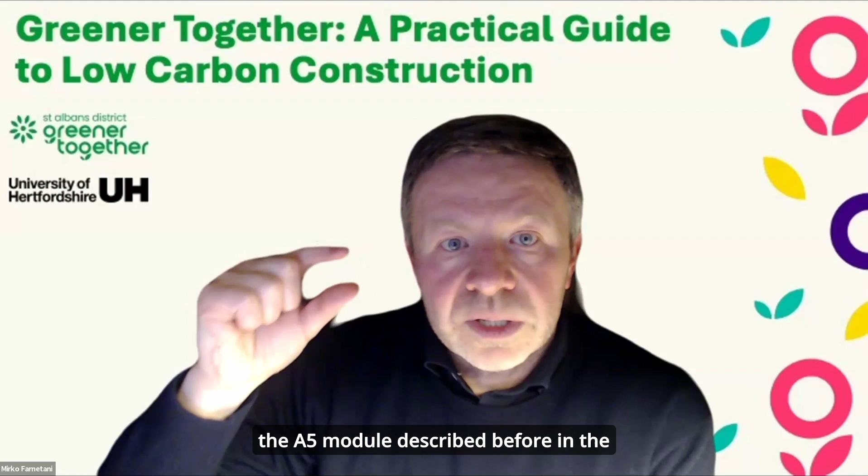Actually it is very well phrased because the question addresses the issue. So, modular units are a great solution for reducing carbon, and particularly for reducing waste on site, and obviously to speed up the construction activity as well. Because construction is sped up, it is possible to reduce the whole building assessment emissions, meaning you can reduce the A5 module described before in the slides, the construction inputs.

However, the carbon reduction coming from construction and waste minimization is minimal compared to the impact you can save from procuring material for your modular units. A modular unit could be lower in carbon because there could be an optimization in transportation of the modular unit as well. This is a plus.

However, and this is addressed in your question, from my point of view, a modular unit which is not fully demountable could, at the end of life of a building, be considered for demolition rather than deconstruction. And therefore, obviously, the advantage of a modular unit will be dissolved.

What I normally like saying is that instead of designing for assembly, you should design a modular unit to be able to be deconstructed as well. So in this case there will be no losses at the end of life of the building, or you could give the opportunity to deconstruct a modular unit.